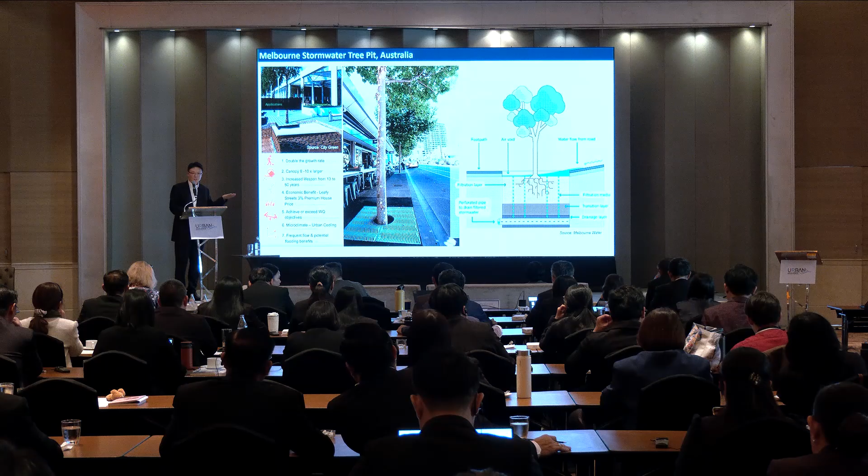So what it essentially does is that every time it rains, the tree gets a drink because of stormwater. So it doesn't rely on humans to actively, manually irrigate, as we see in the raised tree pits everywhere in most cities in the world. In this case, because the tree gets better water, it also gets the nutrients carried by the stormwater in terms of nitrogen and phosphorus.

We get a much better and healthier root system. And that leads to a better and healthier canopy, as you can see here. And if we line up the whole street with such tree pits, we're going to get really good microclimate benefits to mitigate urban heat. So that's where the multifunctional and multiple benefits come in.

Okay, so in the rest of this presentation, I'm going to give you five scenarios where you can use nature-based solutions to deal with the existing and emerging challenges in the urban environment. The first one is stormwater pollution. Okay, so the first thing I want to say is that stormwater is not clean. It carries a lot of pollution that we generate in the urban environment due to our day-to-day activities. Driving cars, human activities, and all kinds of things generate pollution.

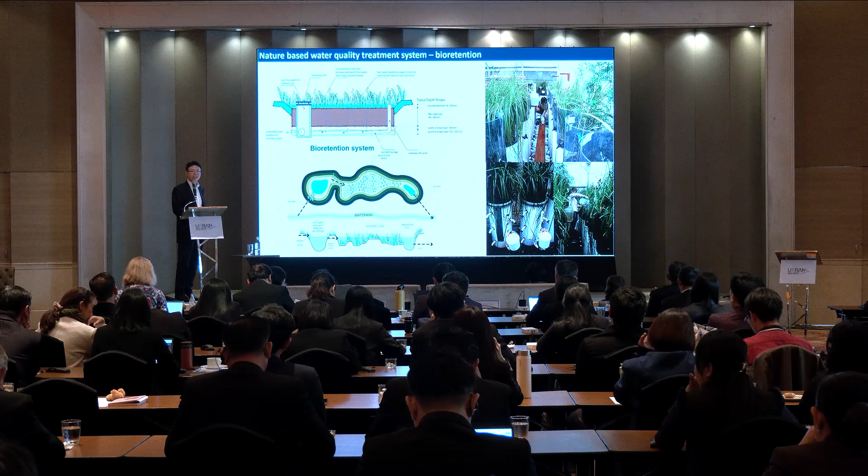And that's why we developed a bioretention system. Some countries refer to it as rain gardens or constructed wetlands to perform that role. And with the engineering marvel, we're able to really break it down to a tiny planter box, as you can see here. It's less than 1 square meter. What we're doing here is using that planter box as biofiltration to intercept the downpipe from the buildings. Therefore, that allows us to integrate this system in a very dense, tiny urban environment.

And what's really interesting is it allows us to plant vegetation, climbers in this case, so we can beautify those really tiny urban spaces that desperately need greenery. And we see this as public urban furniture.

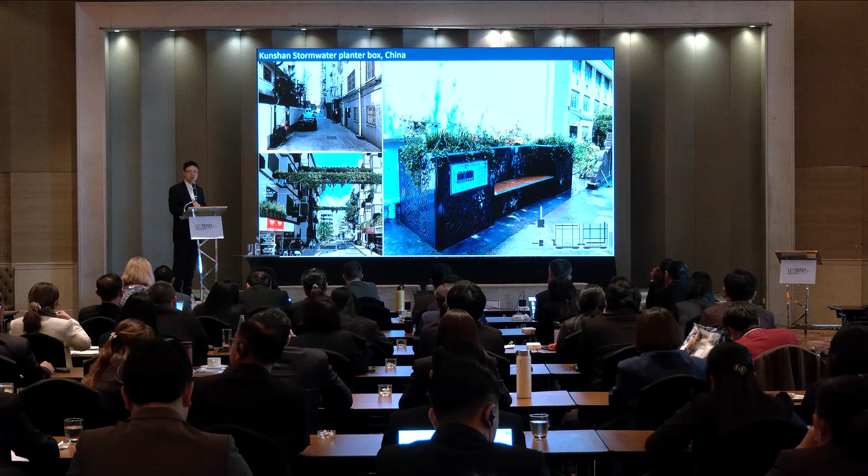Given it is very hard and very expensive to separate a combined sewer, particularly for those old residential estates, what we can do is intercept those downpipes and harvest that stormwater so that the majority of it never goes into the combined sewer. That's how we can help them reduce combined sewer overflows, because 90% of stormwater never goes there. But how do we use that stormwater?

We want to use that stormwater to build public furniture. In this case, it's a planter box, but it's also seating and supports a range of ornamental plants to help this community increase greenery in this very tight urban environment.

And we also tried to introduce a similar idea 3 years ago to the City of Rayong as part of our regional RUCAS project. It's called the Resilient Urban Center and Surrounds Program, funded by the Australian government. And we're trying to offer a solution to these emerging challenges from Rayong city, and they are urban heat, flooding, and very frequent combined sewer overflows. As you can see, there are virtually no trees, no vegetation in those streets.

So the strategy we developed for City of Rayong is called a green canyon strategy. Instead of just looking at the buildings or just the street itself, we actually want to look at the space sandwiched by the two buildings as an urban canyon. And if we look at it this way, there's a lot of things we can do with that. So what we have done is build a stormwater planter box that harvests the water coming down from the buildings and is used as a planter.

So all the cafes and shops on the ground floor can use that furniture as a partition to separate the seating and tables from the traffic. But at the same time, we also want to introduce tree pits so that we make sure the stormwater generated from the streets and roads doesn't go into the combined sewer. It actually goes to the tree pits and infiltrates into the ground. And if we can tackle the stormwater generated from the buildings and the road, we can remove a significant amount of stormwater which would otherwise end up in the combined sewer, and that is causing the combined sewer overflows. Hopefully, City of Rayong can implement this strategy at some point in the future.

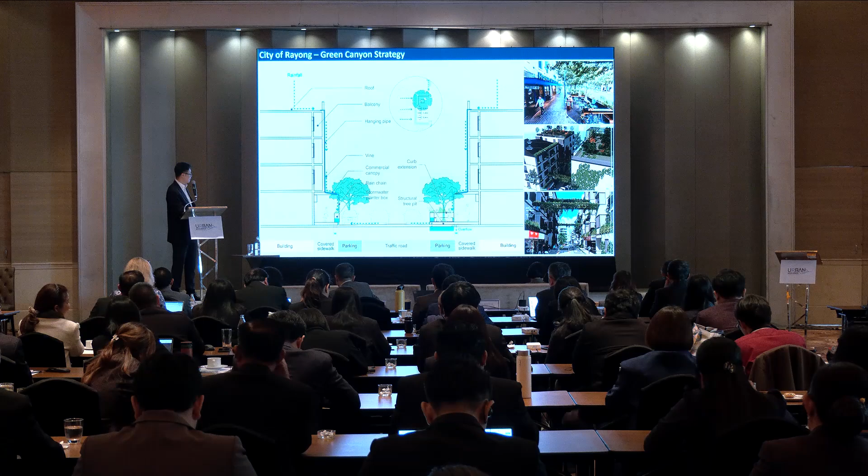And the third scenario I want to talk about is water resources. Because if we know how to use nature-based solutions to manage water quality, the next logical step is to ask whether we can harvest it, because it's clean water. If we let it go, it will be a waste. That's exactly what we're trying to do in Melbourne. Of course, the major driver in Melbourne is that we are projecting to have about 8 million people by the middle of this century. So the key question everybody has to ask is: do we have enough water to support 8 million people? Well, probably not.

We don't have it. Well, the conventional engineering approach would be: can we divert water from another catchment? Just build very long pipelines and take the water away from other users because they are rural. We can possibly bully them. I'm just kidding. But that's not what we want to do, right? We want to think about whether the city can support itself. We talk about self-sustaining a lot, and this is exactly what we're trying to do.

So the research we have done shows, within the city boundary, how much water we actually consume for drinking, how much stormwater we can generate within our city boundary, and how much wastewater we generate. And if you simply do the math and add up the stormwater and wastewater, they far exceed the amount of drinking water required by our city. So technically speaking, we don't need to divert water from anywhere. If we can recycle the stormwater and wastewater well, we'll be self-sufficient in terms of water supply. And that's exactly what Melbourne has been doing.

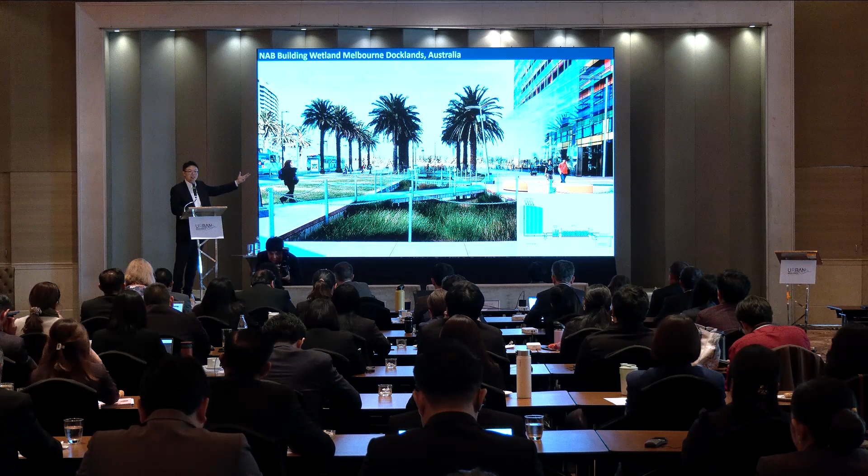So the next one I want to show you is relatively large scale. This is about a 1 hectare wetland taking water from the urban waterway, and by gravity we're able to divert that water through this wetland, snaking around, and the clean water is discharged into this pond. And by doing so, we're able to remove a lot of stormwater pollutants. As you can see here, 90% of total suspended solids and 80% of total phosphorus. But most importantly, we use this water to replace the potable water which would otherwise be used to irrigate this park. So a lot of savings for the local government through potable water conservation.

But at the same time, we increase the ecological value and build an ecological habitat, because what used to be in this place was just pure grass, with only one function and low ecological value. But we turned that into a natural wetland that also has stormwater harvesting and treatment functions. So it attracts a lot of birds, as the gentleman talked about this morning, and also fish, frogs, and dragonflies.

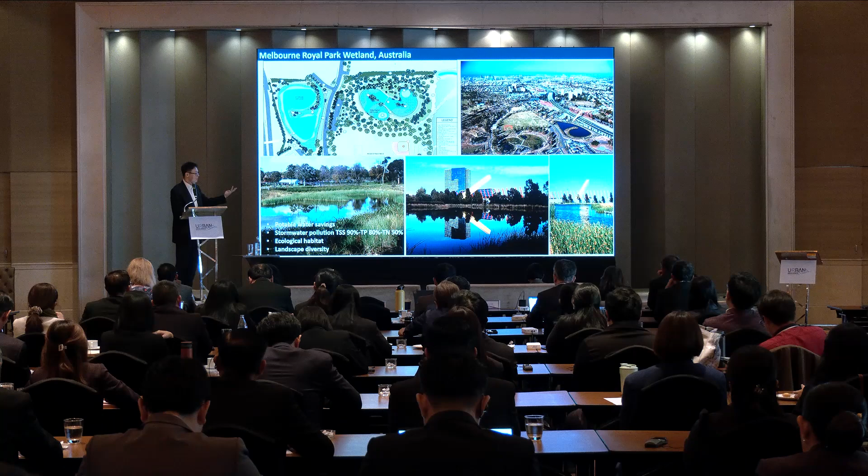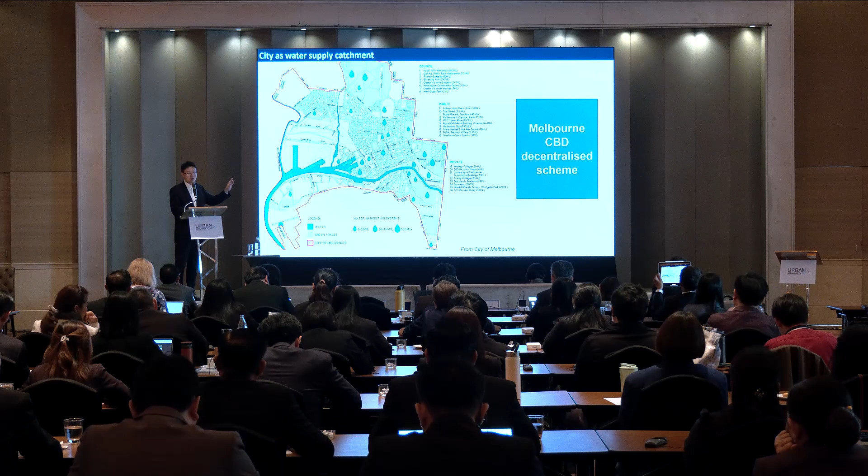We have a whole ecosystem going on in the urban environment. So this is a decentralized water master plan, and not master plan, the state of play, as you can see, for the city of Melbourne. Each of the drops represents already completed either stormwater harvesting programs or wastewater recycling programs. They work hand in hand with the centralized water supply system in the city. That is the thing that helps us to deal with the population growth in the future without overhauling the major water supply infrastructure in the city.

So the first one, I know this must be very relevant to the RD colleagues here, flood resilience. And the way we try to do this, it requires a complete change of mindset from the engineering approach. So one example I want to show you in Melbourne is, how do we actually increase our flood resilience? The conventional way would say, okay, can we change our pipelines from a 1 in 2 year to maybe 1 in 20 year? And then we'll be done with it. But it's very expensive, so we spend all this money building an underground pipe that, technically speaking, only gets full every 20 years. And people see nothing of it, because everything is buried underground.

Another way of looking at this is that maybe we should just upgrade the pipe to 1 in 5 years, and we spend the rest of the money beautifying the landscape above ground and making it multifunctional so that people can benefit from this. And this is exactly what's happening here. So on this road, we converted a central median into a sunken one. It's not raised, it's sunken, and it's a flush curb, as you can see. So basically, there's no curbs. So all the water from the road surfaces and the adjacent houses flows into the center median.

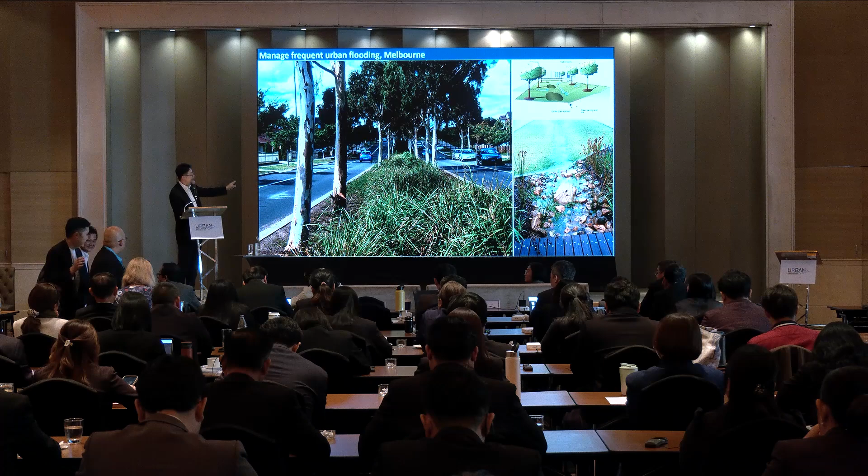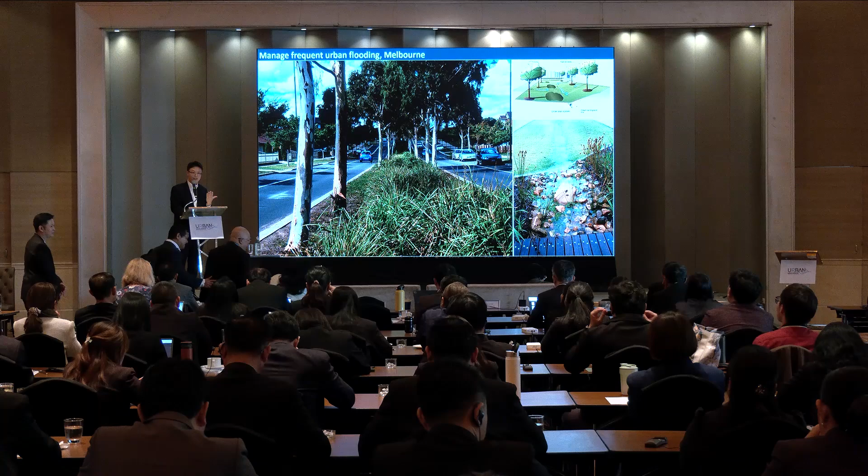Minor events, small events, water will penetrate underground and get treated before the clean water is stored and harvested in the lake downstream. For bigger events, this entire central swale is a flood conveyance corridor. Right? So it helps us to convey the flood downstream, but just not in the conventional sense, not in the pipes, but in the overland flow format. The beauty of this is that we have much more benefit in terms of passively irrigating the trees. You can see how the trees are growing crazy compared to the trees on the other side, because they were all planted at the same time. Right? The shade created by the trees gives us a lot of microclimate benefits and amenity for the local community.

Okay. And this is an example in China, in a city called Kunshan. This project was built nearly 10 years ago. It's a major endeavor because we built a multifunctional corridor for the city of Kunshan along a 40-kilometer long elevated ring road that's framing part of the key city. So how this works is that the gray represents the traffic, which you see in Bangkok all the time. The green is both a landscape but also wetlands nested within the green corridor. And the blue is the canal, the waterways.

So every time it rains, the water from the gray infrastructure discharges into the wetland first. So water gets attenuated and treated before the clean water discharges slowly into the blue corridors. And during extreme floods, the water level in the blue corridor will start to rise and inundate part of the green corridor, to increase the flood attenuation and conveyance capacity. So that's how we make this gray, green, blue corridor work. And the beauty of this is it's not an engineering solution. It's a hybrid and it's completely blended into this urban environment.

The next project I want to show you is the Kunshan Forest Park. This park, you can see, has huge water bodies. And I see similar water bodies in Lumpini Park all the time. And as you go there, you probably notice all the water bodies of Lumpini Park are disconnected from the external canals by either sandbags or gates. I suspect the reason is that they don't want the pollution from the canals to make the water quality in the lake bad. Okay? So they were doing the same thing in Kunshan before the project.

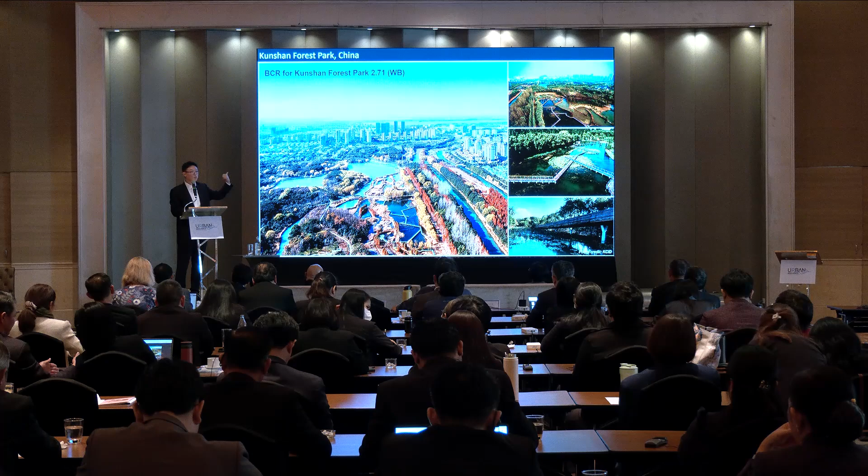And what we find is the benefit cost ratio for this park, in real terms, not before the project, this is after the project, is 2.7, which means that every dollar the Kunshan government spent in building this park is generating $2.7 back to the entire society. So what a great success.

Okay, I think this is probably the last one, the urban heat mitigation, which is very much relevant to any cities in Thailand. So I just want to quickly show you how the research done in Australia supports the strategies we developed today. We find, of course every country finds this, we're able to quantify it, that the shading from the trees, together with the evapotranspiration effect of the trees, helps us significantly reduce the land surface temperature, as you can see from the thermal images.

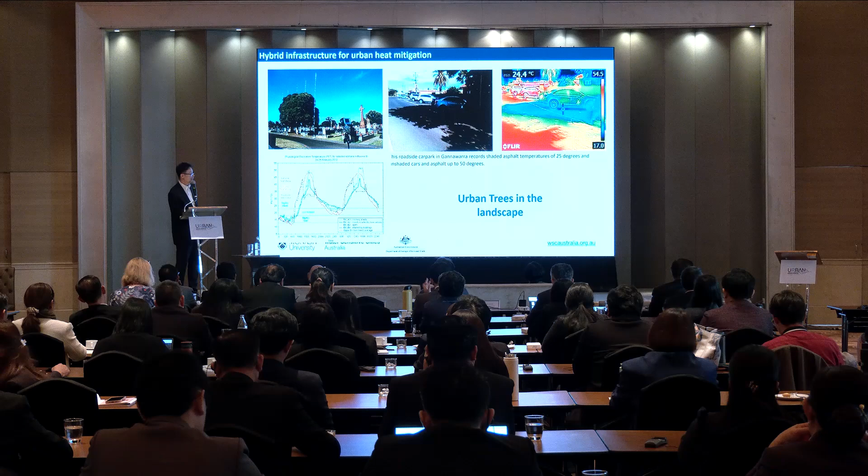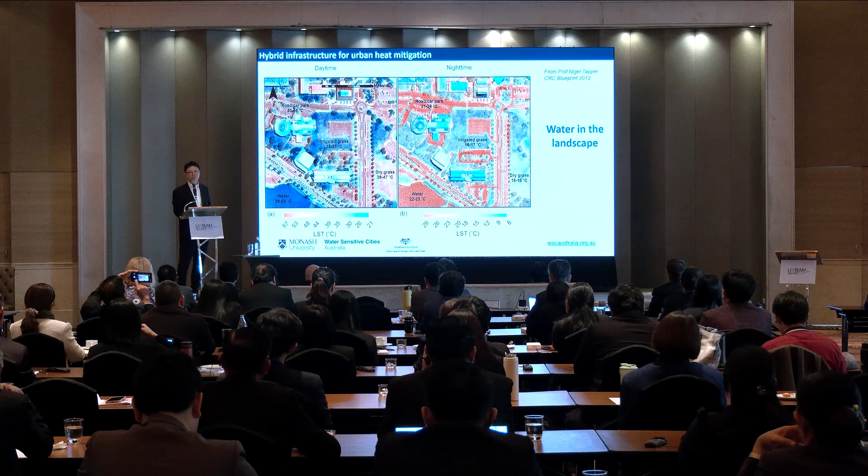So the key idea is that we have to keep our trees in the landscape. And that's not enough, because we also find in a green space such as grass, if it is dry, in heat waves, the dry grass has the same surface temperature as the concrete. So it's pointless. You have to irrigate the grass to increase the moisture level in the soil for it to cool down the city. Right? So those two are very important strategies that we developed from research. Keep trees in the landscape, but also keep water in the landscape. Don't let it go.

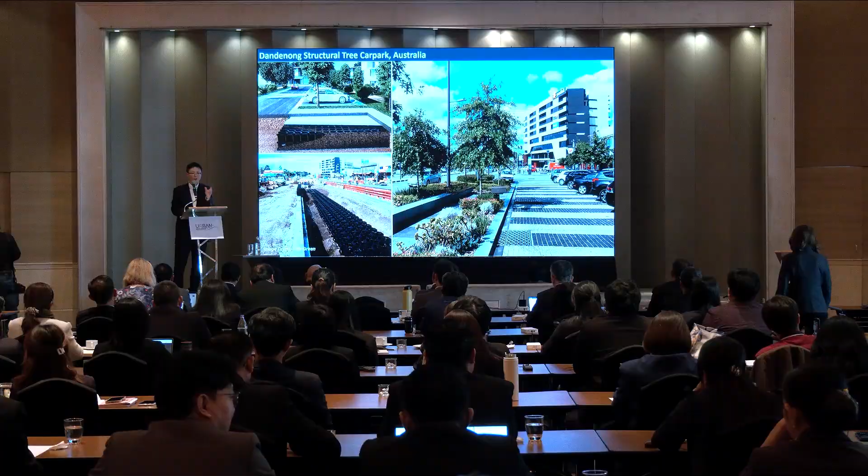What I mean by that is since it's a car park, we want all the loadings, the bearings of the cars, the traffic, to penetrate down to the underlying structures, not into the soil. So the soil is never compacted. We have well-irrigated, well-aerated soil to support much healthier and better roots. And that allows the trees to grow much healthier, larger canopies.

Right? And the car park is actually sloping towards the tree pit. So those structures allow us to collect and treat the stormwater for irrigation passively, but also keep the soil loose forever. And those trees are growing much, much quicker than with the conventional approach.

Okay, so the next one I'll show you is again in Kunshan in China. In this case, we show that we can introduce constructed wetlands in the public plaza that help us to manage stormwater as one of the functions, but also help us to recirculate a large ornamental pool, as you can see from the photo on the top right, so that they don't have to use potable water to maintain that water feature. Everything's done and maintained by stormwater.

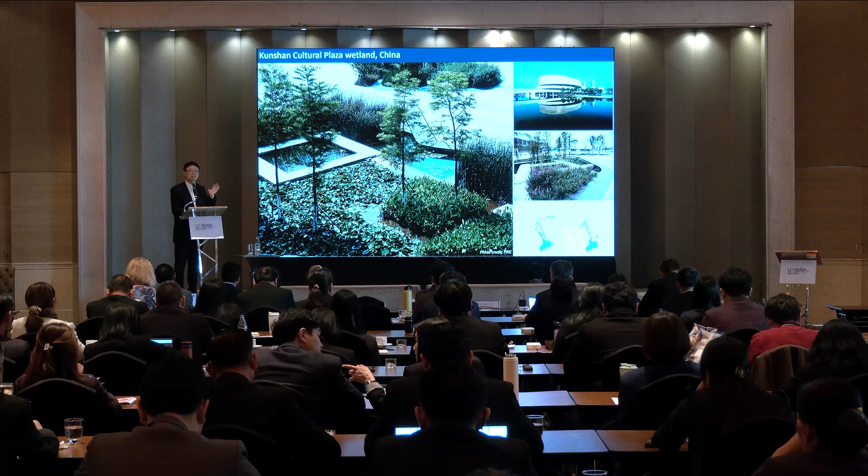What is really interesting is that we developed and designed this into a mini aquatic botanic garden, because we squared these things up. Each square is occupied by one native aquatic species. And we also introduced swamp cypress, right? Trying to make it a mini swamp forest. And we had a lot of resistance from the government. Basically, they said the swamp cypress never grows in the water because it can only grow on the land. But if you design plantings properly, they can also grow in the water.

And this is what it looks like in 2019. See how much canopy shading is coming from the trees. When people go to that plaza in the summer, they only go to two places. They either go to Starbucks, or they go under these trees. That's how successful we see it.

And because we built these concrete paths really wide, we're actually inviting the kids to come in. They can see the dragonflies, they can see the little fish. I don't know who raised them in this. But they start to appreciate nature, because we bring nature back to the city through the combination of engineering and nature-based solutions.

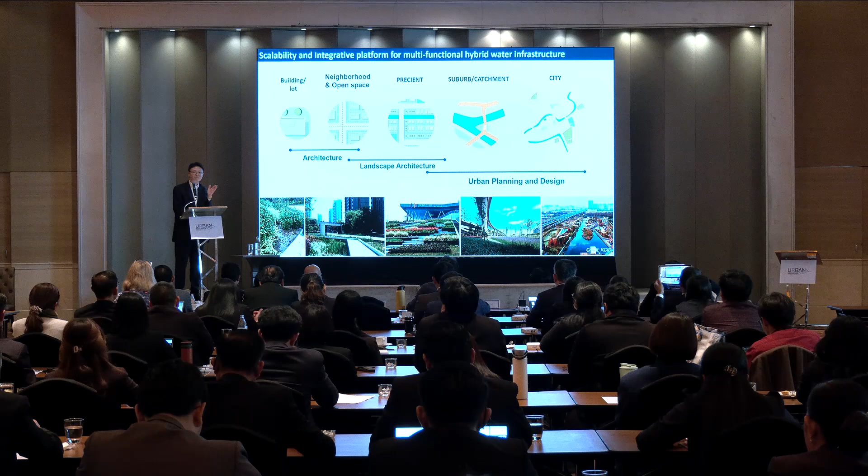But I want to apologize to IUCN because IUCN asked me to give a definition of NbS in this presentation, and I haven't done that, and there's a reason, right? So this slide shows you, again, all of the nature-based solutions can be done anywhere in the world at any scale. We just need to know how to design them, okay?

And today we showed you some of the cases from building scale to precinct scale all the way to the city scale. And the reason I haven't fulfilled the request from IUCN is because we don't want to give you a boundary to contain your thinking. We want you to be open-minded. And that is because nature-based solutions are not the same as nature-based technologies. So what is the difference?

Nature-based technologies, you can say green roofs, bioswales, rain gardens, constructed wetlands, they're all nature-based technologies. But they are not nature-based solutions because nature-based solutions include a carefully crafted strategy to address a specific problem. That's why we call it a solution. It is a solution to a specific problem. Right? I'll give you an example.

When people get sick, when they go to see the doctor, they need to get a diagnosis of what the underlying problem is. Right? And then the doctor develops a therapy, which includes prescribing the medicine. Of course, the patient can go to the pharmacy to buy medicine. It might cure it by chance. But over time, they probably miss the real underlying cause and potentially cause more damage to themselves. That's why the strategy is very, very important and essential.